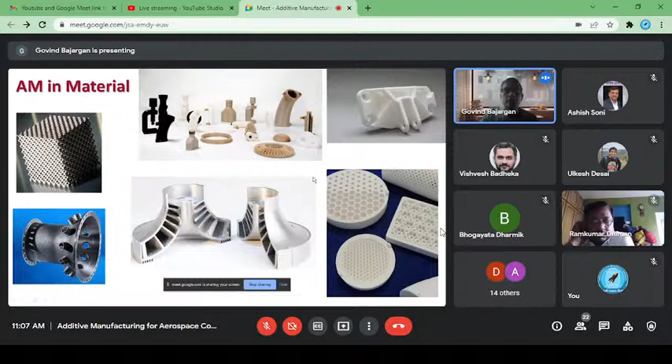So where AM is concerned - in metals, ceramics, polymers, you name it - additive manufacturing can be used in almost all areas. It gives the opportunity to print lattice structures, complex shapes, and geometries for engines and turbines, in metals as well as ceramics and polymers. Even in composites, AM has been used. In healthcare, it has been used widely. Even in smart structures, where you print an AM component with materials that remember a shape when subjected to some stimuli, you can design components in such a way that the material behaves as if there is no CPU, based purely on structural design. So AM gives you ample freedom in that regard.

So we come to AM, what actually additive manufacturing is. As most of you may know, additive manufacturing is incremental layer by layer manufacturing from a CAD model. You get a CAD model and you slice it, and each slice is deposited at a time to build the final structure. The materials generally used are powder or wire.

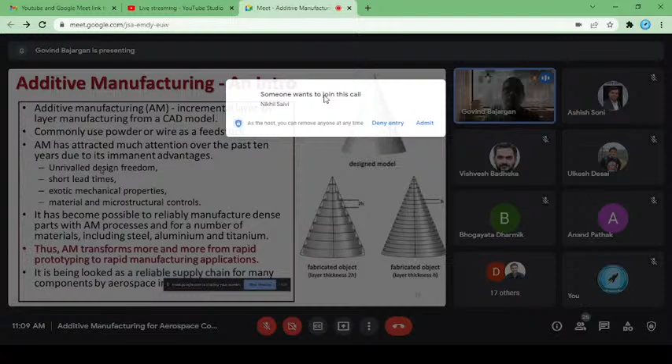Why it attracted our attention is because it gives a kind of design freedom which AM gives like no other process, and lead time is very short. And there is no compromise in mechanical properties. In fact, we found that mechanical properties are far better. It gives very good control on materials and microstructure. The process control is now so good that you can reliably get dense parts from a wide variety of materials without much trouble.

And AM, which was earlier considered as rapid prototyping, has changed to rapid manufacturing. It has become part of a reliable supply chain for aerospace.

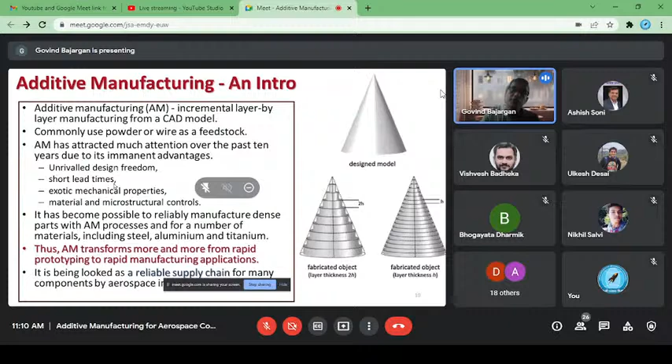Complex heat exchangers like this can be built by AM. So you see the conventional manufacturing, how it goes. A designer designs it, gives it to a CAD department, they generate a fabrication drawing, it goes to the materials team, they make a semi-finished material for that particular component, then it goes to the fabrication team and the final product comes out.

AM demands that all people, the designer, materials team, fabrication team, should come together to finalize the design, process design, component design, and then a product comes out. So there is a need to have integrated structural materials design tools, which will accelerate adoption of AM for the aerospace design community, and it can lead to innovative designs which save energy and weight.

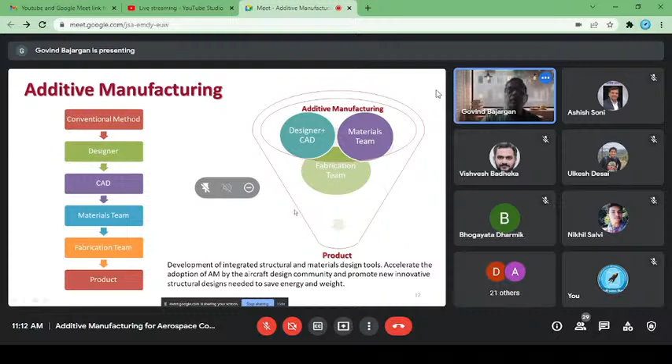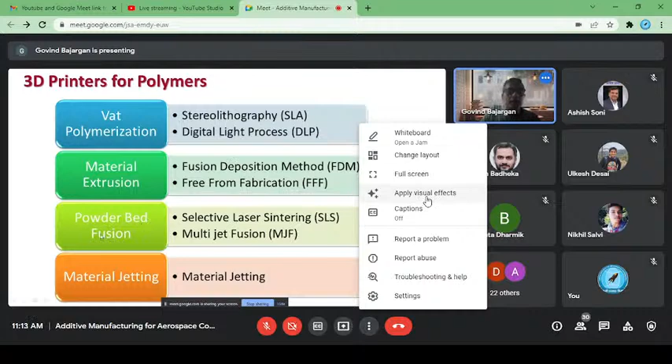So now they are basically based on 4 different types: vat polymerization, material extrusion, powder bed fusion, and we are doing curing, selective curing. There are 2 techniques: stereolithography and digital light processing. Material extrusion, we have FDM and free-form fabrication. Then powder bed fusion, we have selective laser sintering and multi jet fusion. Material jetting is another process.

So we'll come to the details of the process. Here is a polymer bath. There is a polymer bath, a laser is exposed on the surface as per the 2D slice, and it selectively cures it. After curing of one layer, it moves down by a distance equal to the thickness of the layer, and then the next process starts. So the adherence of one layer to another is controlled by the depth of curing, and this process is widely used for realizing polymer components: polycarbonate, ABS, polypropylene.

We have used it extensively in making investment casting patterns, and it is a very good tool for that.

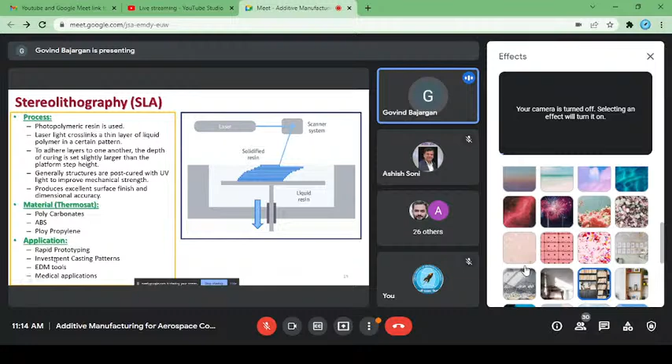In digital light processing, the process is slightly different than SLA, that is stereolithography. The platen movement is upward here, so the part is built at the bottom side of the platen, and the bath, the polymer quantity required, is much less than what is needed in SLA. So light comes from the bottom, and the bottom of the tank is transparent to the light, so light is exposed.

Light exposes the full layer of the photopolymer resin in one go. Unlike the previous case, where a laser was tracking the 2D sketch continuously in a layer, here in one go, full light exposes the full layer, so the printing rate is much faster. Moreover, it uses very common light, like LED lamps, which we use in the house, can be used for this. Once that layer gets photo cured, the platen moves up, another layer of resin comes in and it gets exposed. So this is the way it goes.

FDM is fusion deposition modeling, wherein thermoplastic filaments are used. There is a liquefier which is resistance heated, and filaments are fed to this liquefier, which deposits liquid.

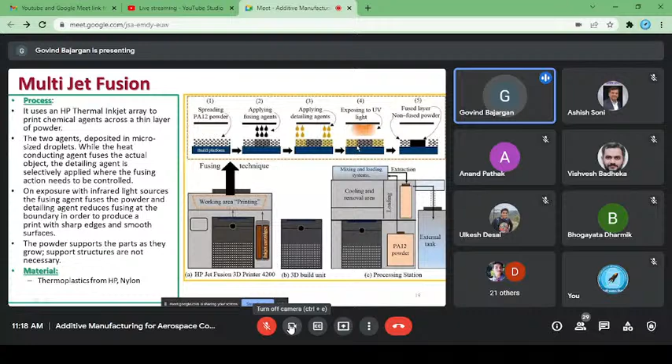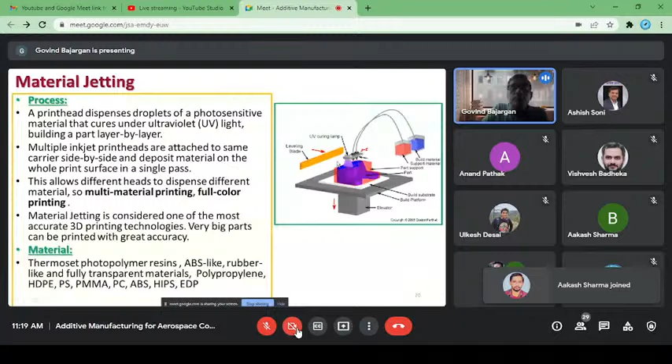In metal 3D printing, we have powder bed fusion, direct energy deposition, binder jetting, and sheet lamination.

In powder bed fusion, also known as selective laser melting, SLM, or electron beam melting, a metallic powder is laid on the print platform, and a laser scans as per the 2D drawing, then the build platform moves down. This is how powder bed fusion builds the metal part.

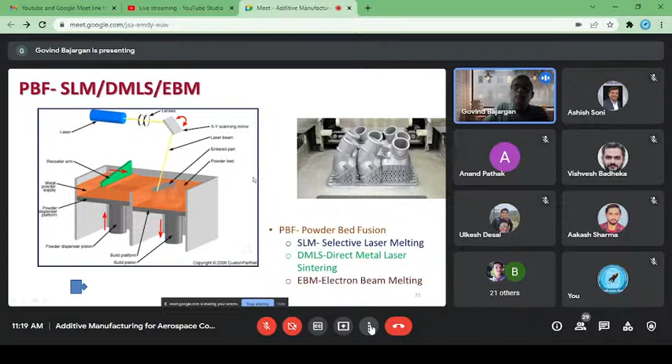In DED, direct energy deposition, there is an energy source. It can be an electron beam, or here it is a laser. There are two ways by which powder can be fed in DED powder processes.

It can be like in the center we have a laser source, and from the side powder is fed to the portion where the laser melts the base material, and this whole assembly moves as per the 2D sketch of the plane. It can also be coaxial, so either coaxial or from the side, powder can be deposited.

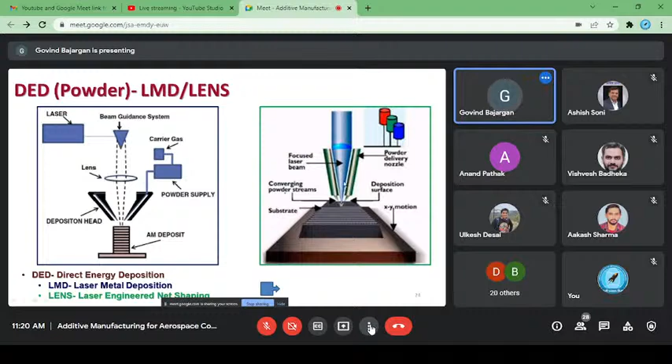Here we see the advantage that we have multiple feeder powder nozzles. It is possible to deposit a gradient in the material by feeding different powders.

We also have DED wire. Here we have an energy source, which is an electron beam or a laser, and the wire is fed and deposited.

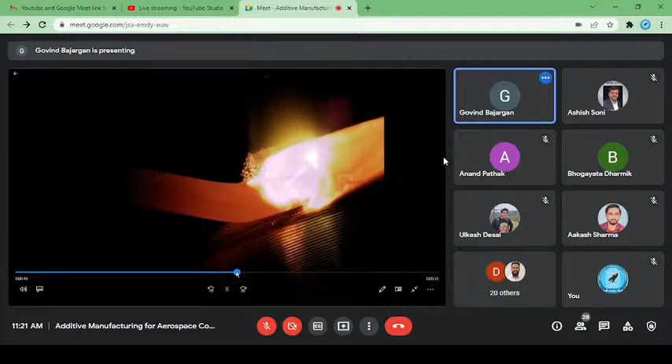See how liquid is getting deposited on any curved surface. This is a part fabricated, and this is after machining.

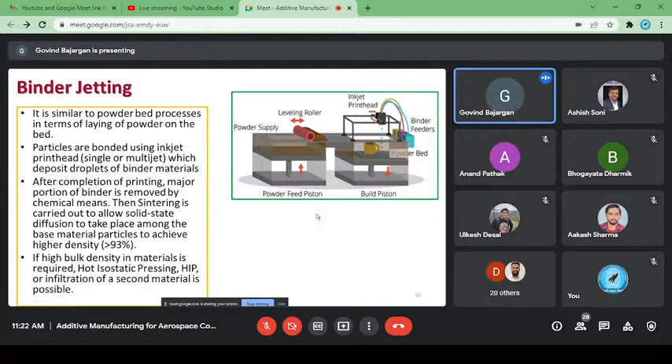This way we can build parts. So there are plenty of options available.

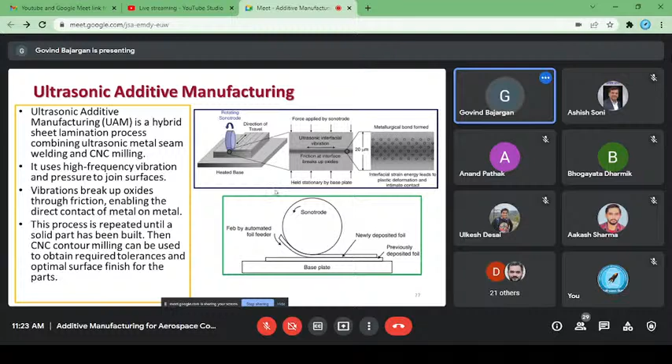There is another aspect: powder bed fusion sizes are limited. The maximum available now is 800 mm. But when we have to build a large part, we have to go for DED LMD or DED EBAM processes. Their build sizes can be larger, but complexity has to be compromised. So if parts are complex and small, powder bed fusion is an ideal technique. If they are large, we have to go for DED processes. It's also possible to have hybrid printing.

So, the AM process flow chart - we have just learned about powder bed AM techniques for metals as well as polymers, but now let's see the workflow of AM processes. First we make a 3D model, then convert it into STL format. Once conversion is complete, we decide on the part orientation, how the part is to be printed. Based on the orientation, support generation is finalized. Once support generation and orientation are fixed, the part is sliced into layers. For each slice, we finalize the tool path, and then the 3D printing process is carried out, after which it is subjected to post-processing and inspection.

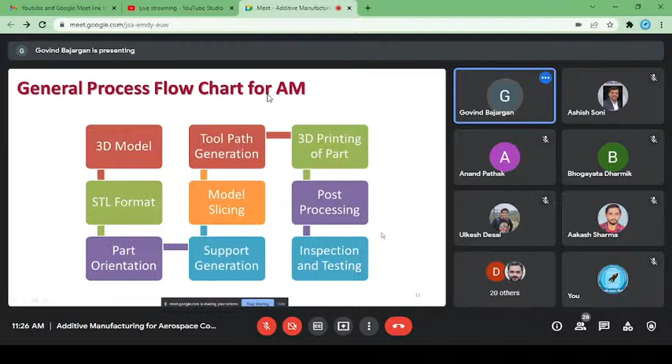So what is STL format? It is a standard tessellation language based format. It converts your mechanical engineering model - you must all be aware of it. The surfaces of a 3D model are represented as triangles. A CAD model generally contains information of both geometry and topology, but STL format carries only geometrical information. So we miss the topological information when we convert a CAD 3D model to STL format.

Each triangle is defined - in STL format, each triangle facet is defined by the 3 point coordinates of the facet and a normal to the facet, which shows the outward direction. So these are the three: this is the facet, these are the 3 points, and the normal to the facet defines each triangle. So we try to minimize the triangle size, because the smaller the triangle, the better the resolution in the AM process, which you will soon understand.

So we have more data points - if we reduce the size of the triangle, we'll have more data points. So the topological information which is missing can be partially contained within the geometrical information in STL. STL has its own problems, like inverted triangles, gaps, and overlapping.

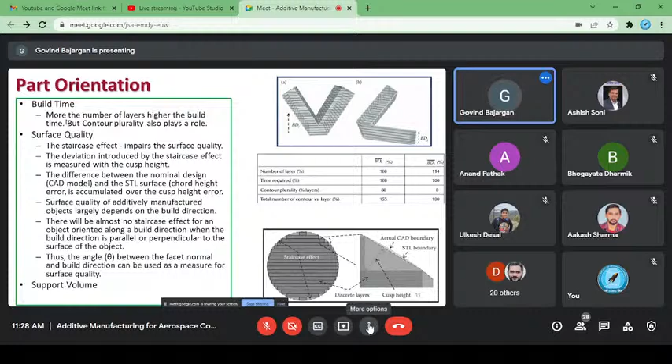Once we convert into STL format, we go for build orientation - we have to define how the part should be built, what the orientation should be. Orientation basically governs build time, surface quality, and support volume. So we want an orientation where build time is minimum, we get the best surface quality, and we require minimum support volume.

Okay, I'll probably not go into too much detail on this. Regarding surface quality and build time - suppose there is a rectangle, and if you build it such that its largest side is in the Z direction, then the build time will take more. So you will always want the smallest dimension in the Z build direction. That is the concept.

But there are many other complexities which control the build time. Then there's surface quality. When you divide the STL file into slices, you get an effect shown in the right side bottom. This is called the staircase effect, which impairs the surface quality, and it is to a large extent controlled by the thickness of the layer.

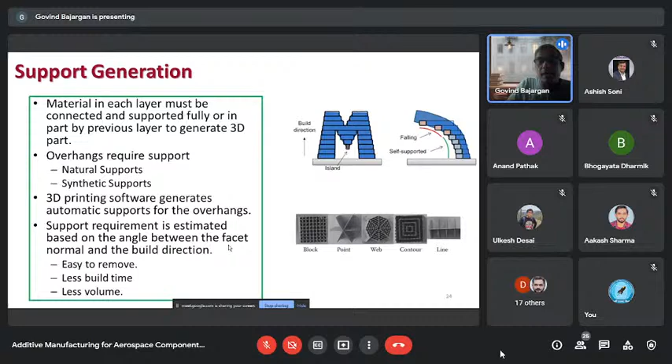But most AM processes use uniform slicing. The problem is that if we go for adaptive slicing, the material delivery system has to be controlled accordingly—wherever the layer is thicker, more material has to be deposited, and where the layer is thin, we have to deliver less material. That's one problem. The second problem is that when layer thickness is more, the energy input needed to melt that layer changes depending on the layer thickness.

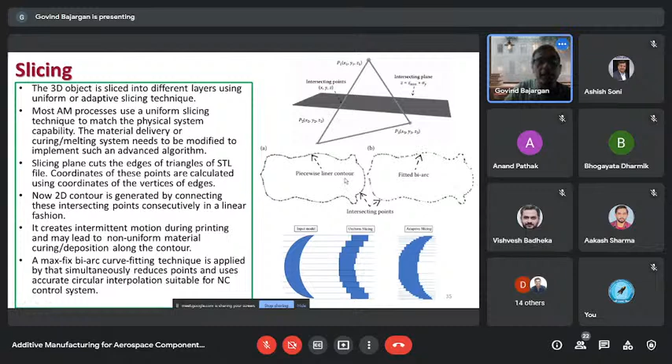We are not comfortable with that zigzag motion, so the whole contour is smoothened by curve fitting. This gives us the opportunity to control the losses we had in chord height error, and we get a smoother contour with fewer points, which can also be reduced.

Next, we go for tool path generation. So we had STL format, orientation, build-up, support, and slicing. Now each slice needs a tool path — we have to define how the energy source should move on that path to generate the product.

In addition, we have to do a contour scan. The whole outer profile is scanned by the contour scan first, or it may be the last operation depending on what we choose. So there is infill scanning and then contour scan — both scans have to be done.

Now the process controls are so good that we can get a fully dense part, and we can control the microstructure and properties. We can minimize build time and residual stress. These options are available, and these processes give ample freedom to control these parameters.

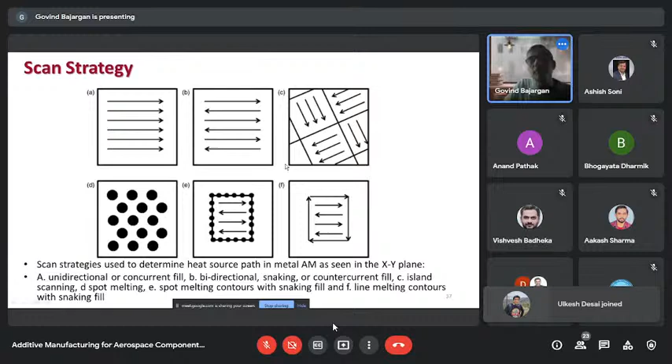Now there are many AM materials. Additive manufacturing inventors initially worked with commercially available materials, since that was easiest, and process parameters were developed for these conventionally available materials. Even for some newer materials, process parameters have been developed. But I strongly feel that just as we have cast alloys and wrought alloys, we will also have AM alloys — alloys which will comprise many conventional materials, as well as new materials that cannot be processed by any other process, only by AM.

So this research has some inherent advantages. Because of the inherent processing advantages AM gives, it is possible to design alloys that we were not able to process conventionally. Now it is possible to process those alloys, and people are coming up with many new compositions possible only by AM, which can give a very fantastic combination of properties.

Now, since my talk will be more on powder fusion, we've understood the processes. Now let's see how the flowchart goes — the first thing is powder. For powder fusion, we require powder.

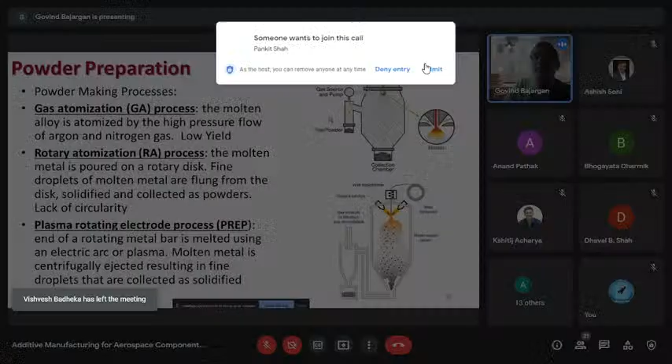The powder-making processes, as most of you know, include gas atomization, where liquid metal is melted in a crucible and allowed to fall through a nozzle, while gas — either argon or nitrogen — is impinged on the falling liquid at high pressure, causing it to break into small droplets which solidify during flight in the chamber and get collected at the bottom.

Then there is rotary atomization: molten metal is poured onto a rotary disc, and when it falls on the disc, it flings away as small droplets, solidifies, and is collected at the circumference. Then there is the plasma rotating electrode process.

It is widely used for reactive materials like titanium, niobium, and so on. Here, an electrode of the material is melted by plasma or an electric arc, and then it is rotated.

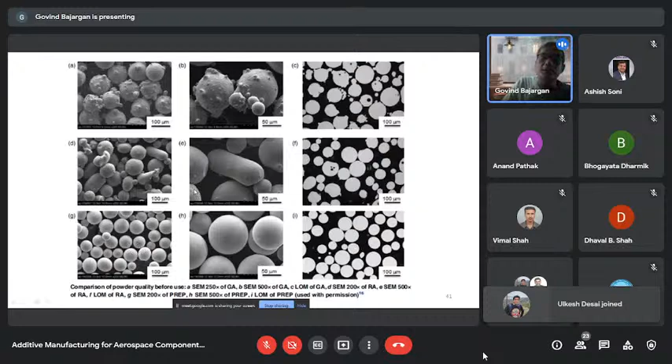So there is a centrifugal action on the droplets which are forming at the arc location, and it is ejected out. During flight, it gets solidified and then collected. So these are the pictures of the powder from these processes. First three images on top are gas atomized, then in middle we have rotatory atomization, and then the PREP process. Through all these processes, powders are made and used in AM.

So once we have a powder, what kind of characterization do we have to do—whether any powder is okay for us, or what kind of characterization we should carry out. So first thing is, what do we want?

We want that in powder bed fusion, when powder is spread on the build platform, its density should be highest. That is the aim we are having. So for a given layer thickness, how to get the maximum packing density for the powder. Then the question becomes, what should be the preferred powder size?

Literature says that the finer the powder, the lower the packing density. So fine powders generally give a lower packing density. So should we go for larger and larger particle size?

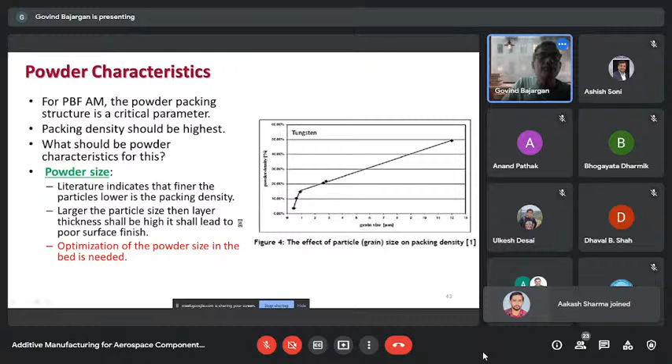That is one part. Second part is, what should be the shape? Generally spherical shapes give the best packing density. And what should the particle size distribution be?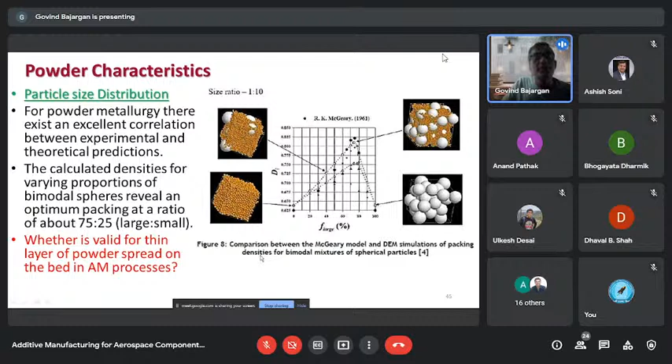In powder metallurgy there exists a very good correlation, wherein it is found that 75% large and 25% small powder, if mixed, gives the maximum packing density. But in AM we don't have the ample opportunities that powder metallurgy has to compact the powder—all those processes are there in powder metallurgy, but not in AM. So whether those findings can be directly taken to AM is the question mark.

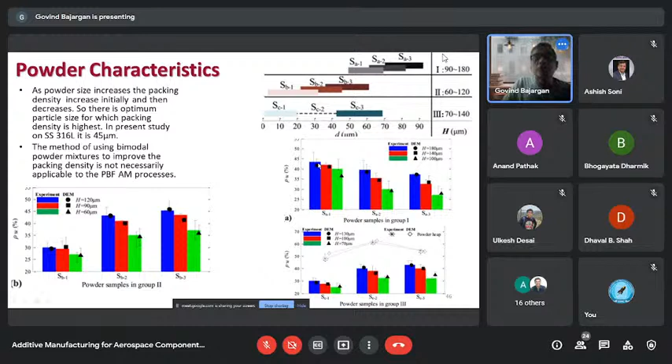There were many studies done on this. I'll not go into details—we'll directly come to the conclusion.

The powder spreading process is actually important. It determines the packing density of a powder layer, and it directly influences the interaction between the powder particles and the heat source, therefore affecting the properties of the finished part. In selective laser melting and electron beam selective melting processes, a dense powder layer makes the fusion more steady.

Why do we want it dense? Not only to have a dense part, but our fusion process—the interaction of the energy source with the powder—becomes quite stable and steady, and we reduce defects like balling, shrinkage, and pores.

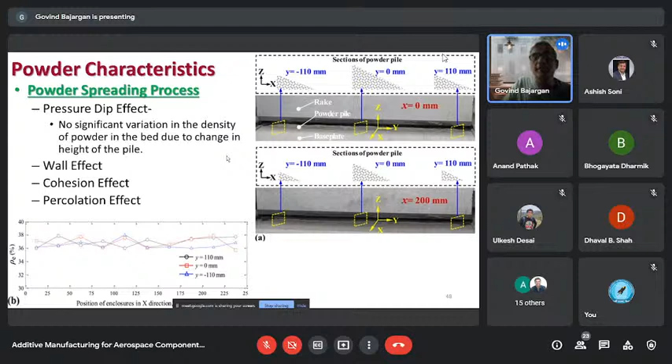When powder is laid on the powder bed, there are many effects that play a role. I'll just give you a glimpse of it—I won't go into details since it's more related to powder metallurgy.

The first interesting thing: this is a rake or recoater, and there is a powder bed height. If powder bed height changes, does powder density change—does bed density change? They found it has no relation with the powder bed height. The powder bed density is independent of height, so whatever height we play with has no role on the powder density.

Another point is the wall effect—the top rake moving and the bottom build platform. Some powders hindering these two walls get pushed away, so the rake and base plate cause porosity in the bed. This contribution increases with increasing particle size—if particle size increases, the wall effect contribution increases, leading to lower packing density. There's also a cohesion effect, where powders agglomerate, and this tendency is more pronounced in finer sizes.

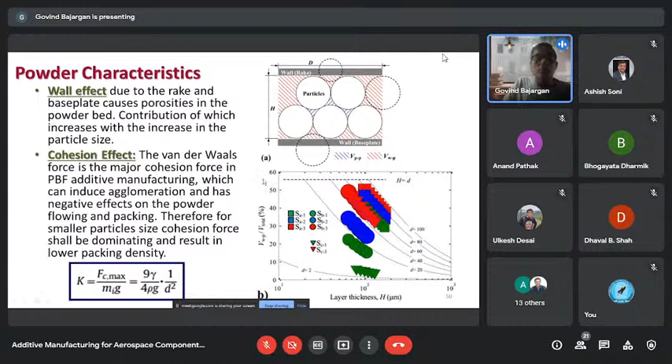All these studies have been done by researchers, and I'll just come to the final conclusions. The guidelines drawn from these studies are that commercial feedstock for SLM follows a Gaussian distribution, and existing results have established preliminary powder requirements suitable for SLM processes: the D90/D10 ratio should be less than 19, D50/D10 should be greater than 10, and 90% of the particles should have a diameter less than the thickness of the layer. This is the criteria which has evolved.

In powder bed fusion AM, relative packing density is generally in the range of 40 to 60%.

Reducing voids in the coarse powder matrix by adding fine size particles may not be a practical solution for SLM, which was widely used in powder metal, because of many effects studied. Powder particle size below 30 micron tends to exhibit clustering behavior due to cohesion and interparticle forces. Powder flowability becomes more restrictive with decreasing particle size. We want powder to flow well and packing density to be highest, so finer particles, which have a tendency for clustering, cause accumulation problems.

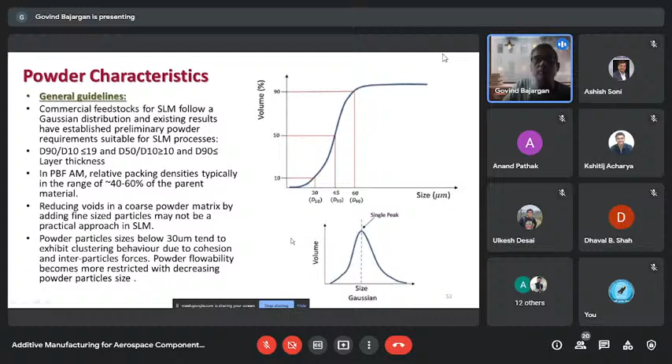So now we know what should be the preferred powder size. Now we can come to what parameters are important for building with an AM process like powder bed fusion. What exactly are we looking for? We are looking for density, maybe 99.5% or higher dense product.

Surface finish should be good, of the order of 10 micron generally we can get easily. Residual porosity should be less than 0.5%, and we want a fine length scale of microstructure, and the deposit should be free from cracking, swelling, and delamination.

There are parameters which are laser dependent, powder dependent, and machine dependent. Laser power and scan speed are really two very important parameters, and then there are spot size and scanning strategies, which are also equally important.

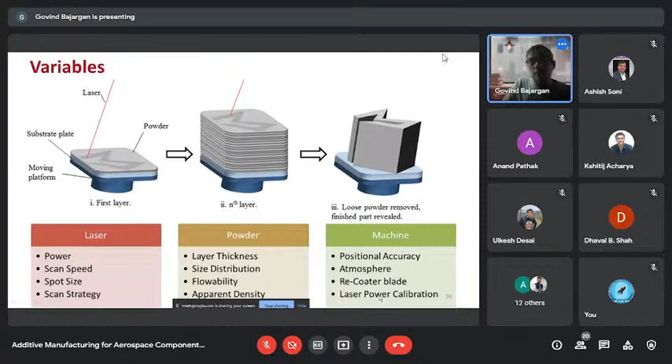Powder characteristics: generally we check flowability and apparent density, and particle size distribution. The machine has its own parameters like positional accuracy, atmosphere, recoater blade, and laser power calibrations. These are the few important things for the machine.

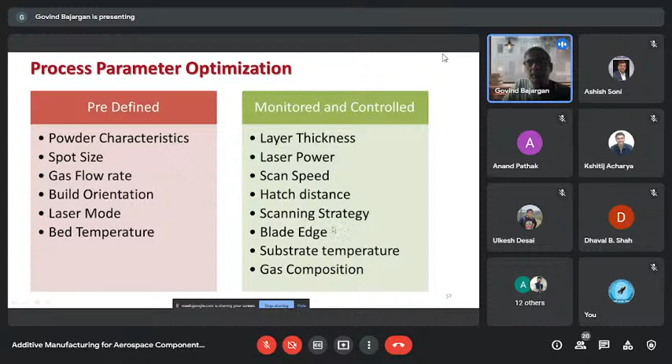So most of these things are predefined. Powder characteristics, spot size, gas flow rates, and build orientation are predefined parameters once we start the build. Then some things we need to monitor and control: layer thickness, laser power, scan speed, hatch distance, and scanning strategy. We'll discuss some of these in subsequent slides.

Studies have shown that if the orientation of scanning is changed by 67 degrees from the previous layer, and we keep doing that, we can control the anisotropy in AM deposits. So now we have learned the parameters, and we have learned about powders and all.

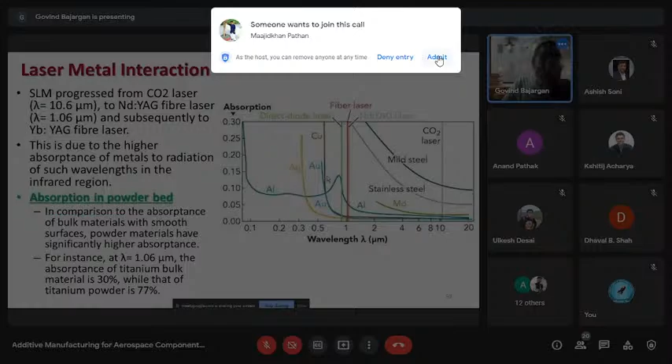Now laser has a very interesting aspect. When we expose the material to the laser, we want the material to absorb that laser. Most of the available data was for solid materials, not for powders. So in a powder bed, how will the absorption be?

It has been found that since the SLM process started with the CO2 laser, with a wavelength of 10.6 micron, shown here in the figure, the solid metal absorption for mild steel, stainless steel, molybdenum, and aluminum can be seen. Aluminum hardly has any absorption, only 2-3%, so most of the CO2 laser gets reflected from aluminum. Stainless steel has around 5% absorption from the solid piece.

So when SLM started with the CO2 laser, it was not possible to deposit aluminum because aluminum was not absorbing enough quantity of laser. Then it was changed to neodymium YAG, and then ytterbium YAG fiber laser. When it became ytterbium or neodymium and ytterbium fiber laser, the absorption quantity on aluminum and others increased, but copper absorption is still very low.

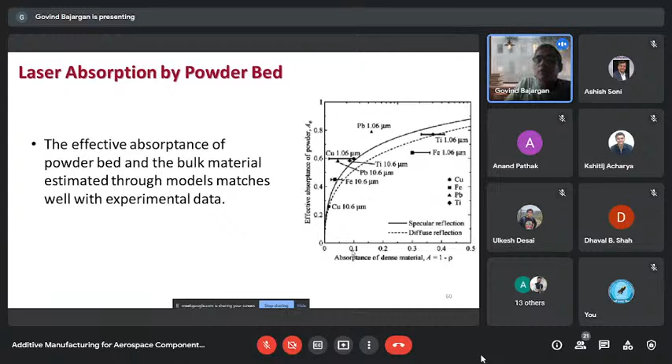So we saw one advantage of using powder bed is that absorption of the laser is far better, and it is good for fiber laser. How does the laser interact with the powder?

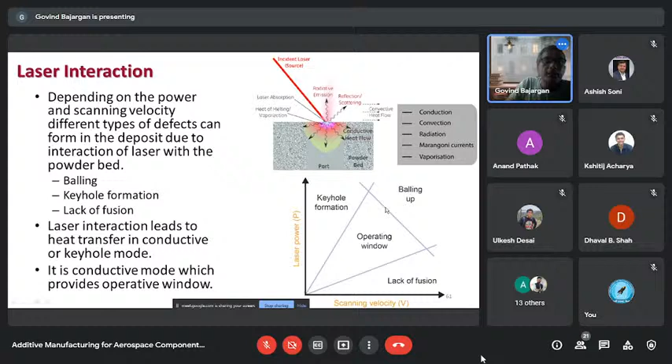So here I'm showing the balling effect. What happens is when laser energy is very high and speed is high, the laser is moving in a line, so we are creating a liquid line, and this line becomes unstable. It's Rayleigh's instability criteria. It is similar to water falling from a tap - if we narrow down the flow, that continuous stream divides into small droplets.

So the same way it happens here. Rayleigh's instability comes into play, and instead of a single continuous track, we end up with a formation of balls or droplets, which will hinder subsequent builds also. There are remedies - all remedies are related to controlling the power and scanning speed.

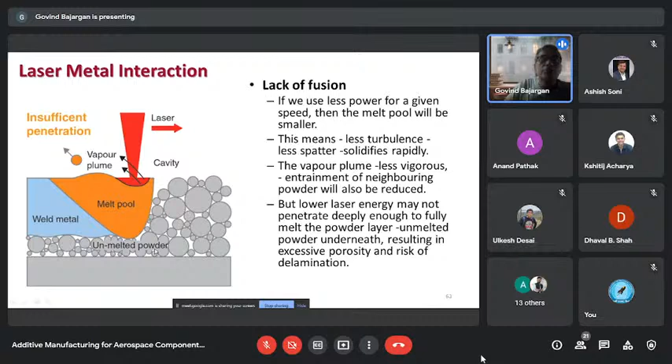So there is another thing. If my energy is not sufficient, I'm not able to melt fully, so there will be an unmelted zone. It'll lead to a lack of fusion. So we have to optimize in this.

And if my power is too high for a given speed, we can end up in a very deep melting zone, and because energy will be so high, some evaporation will happen. When this liquid pool collapses, this evaporation and these vapors get encapsulated, and there may be a keyhole formation. This is why there will be pores because of keyhole formation.

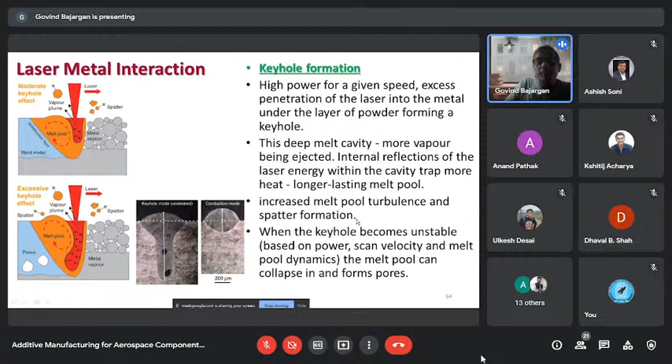Okay, so these are the laser-powder interactions. Just to understand how much energy is required for melting for a given layer thickness, and how to estimate that, I've made a small graphic presentation.

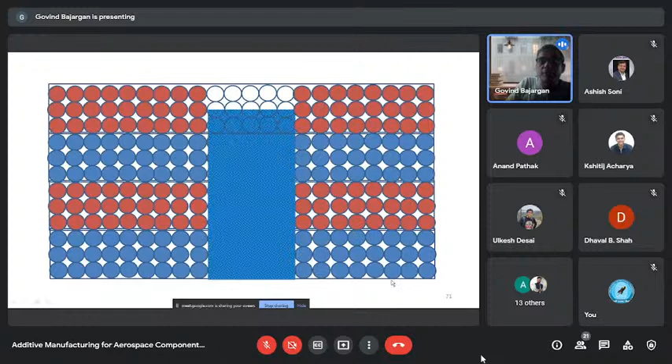So now again, the laser has to melt this much powder and base, so this much amount of energy will be required. Then we come up with 1.5 times the thickness - the powder layer height has become 1.5 instead of one, and now the laser has to melt 1.5. So this way it continues.

When I plotted it with the layers - what will be the thickness of the powder which the laser has to melt - assuming the powder bed density is 40%, 50%, 60%, I find that in the first condition, the laser should have sufficient power to melt approximately 2.5 times the layer thickness. So now, most powder bed fusion parameters are selected in such a way that they are able to melt approximately 3 times the layer thickness.

So this basically is to get a sound deposit, to ensure the bonding between one layer to another layer when deposition is happening. The important parameters, when we talk about process optimization, mainly 3 parameters are really important: laser power, scan speed (the speed at which laser scans the build platform), and then the hatch spacing, meaning the distance between first scan to next scan.

These are the parameters which we have to finalize. Layer thickness and all are generally fixed for most of the processes, around 40 to 60 microns. So we have to finalize what should be the laser power, hatch spacing, and scan speed, so that we can get a sound deposit, required microstructures, and a component meeting all the requirements.

So there are some thumb rules which are used to optimize the process parameters. I'll try to skip this, because it'll be too much detail, as it is based on some analytical models.

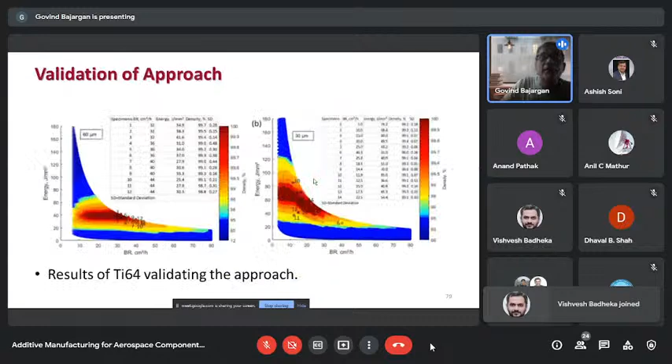So I'll come to one simplified model which people have very innovatively used. What they did is they estimated the melt pool when a laser forms it. This can be estimated experimentally, as well as using the Rosenthal equation.

By changing the process parameters in the equation, we can find out what the dimensions of the melt pool are, and by changing the hatch spacing you can model it and predict where the unmelted zone will be and which condition will lead to a fully dense product. These are very simple techniques people have used to resolve the issue of optimization, because it's a very complex task.

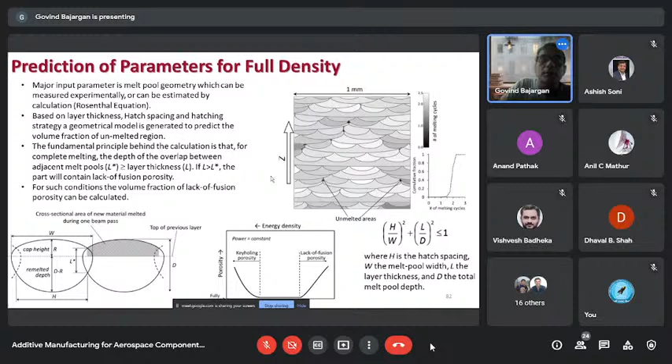We have done a similar simulation in CAD, wherein what we wanted to show is that when we are depositing liquid and the subsequent layer, the scanning angle is changed by 67 degrees. So we know that the laser will melt at least 3 layers.

So we find out the zones which are melted 2 times, zones melted 3 times, and zones melted a single time. We wanted to know if such zones show any change in properties. We did some hardness checks and found that hardness is almost in the same range, with not much change. Microstructurally also, we didn't find too much variation, so it gives a fairly uniform microstructure.

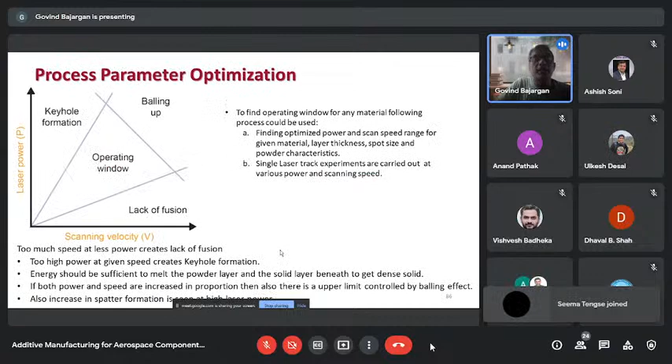Okay, this is also toward parameter optimization. Probably for this audience it may not be that useful, so I'll skip this portion of my talk.

In addition to parameter optimization, particularly what we talked about - laser power, scan speed, and hatch spacing - there are many other important points we have to take up. We have to consider this while defining the process, like part geometry.

If it involves thinner walls sitting over thick portions, or thick portions sitting over thinner walls, it generally leads to heat buildup because heat will not pass through. These kinds of problems can locally change the thermal gradient, and this may lead to residual stresses and other issues.

So we have to find a solution from part to part. Generally this kind of problem's solution lies in heating the bed to reduce the thermal gradient. There are many things like overhangs - if overhangs exist, the bottom portion is supported by powder, which will not have that good thermal conductivity, so the cooling rate will be slower there.

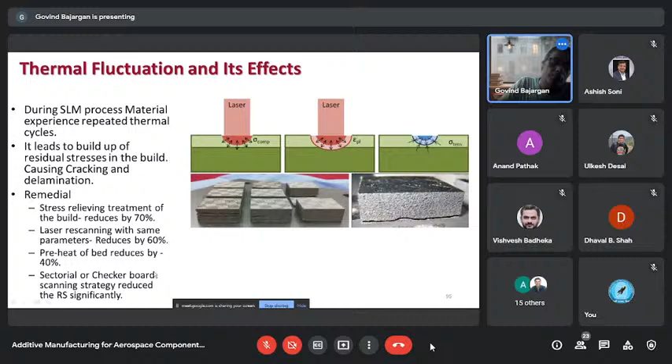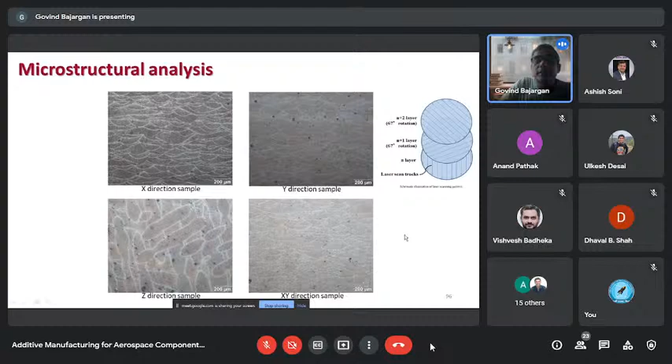We checked the hardness and didn't find much variation. It is well within ±5, which is very common in some materials. The very interesting thing is that the properties we are getting are far better than what we can get with conventional processes.

I was a bit surprised because it was aluminum, and aluminum generally forms an oxide layer on the surface very fast. But in spite of that, even ductility is very good in the as-fabricated, as-printed condition. Then when we devise a heat treatment, different treatments give you flexibility. If you go for different heat treatment combinations, you can compromise strength but get very good ductility—18% you can get. So this kind of freedom is available in AM.

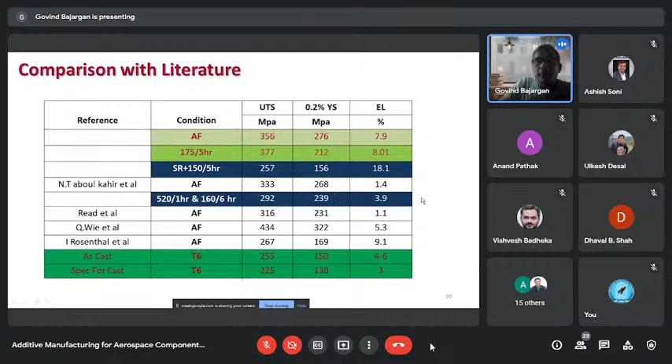And then there's topology optimization. It was not part of my original plan—I never wanted to cover this in this talk—but let me just give you a glimpse of it.

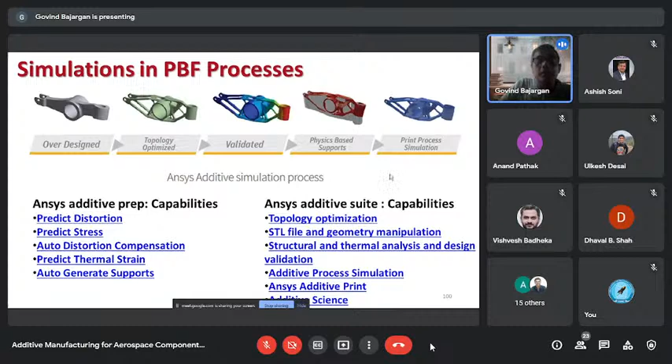So what are the advances happening? One advance that has really impressed me is support-free 3D printing. Velo3D, one company, has come up with a unique approach whereas they can print parts without any support. This is really interesting.

Then there are people coming up with artificial intelligence software for monitoring 3D printing during the process, so we know if something goes wrong in the process, we can capture it. Feedback controls are also being developed—is it possible that when printing is happening and something goes wrong, feedback comes and the process controls it? This would make the process free from trouble, but it is still under development.

In-situ inspection is another area, because when you print a complex part, inspection becomes really more complex. We cannot go with conventional inspection methodologies because it will defeat the whole gain AM gives you. AM delivers components fast, but conventional qualification methods take so much time that it defeats the whole purpose. So there have to be techniques or in-situ inspection technologies being developed.

Body structures like shape memory effects, thermal conductivity effects, and all those things are possible to design, and people are doing that. There's also selective powder deposition—people are developing techniques wherein you can deposit different powders, so you get control on the voxel. Like pixel is in 2D, voxel is in 3D, so you can control the material in a voxel—what property you require in a voxel, that level of control is being attempted through AM.

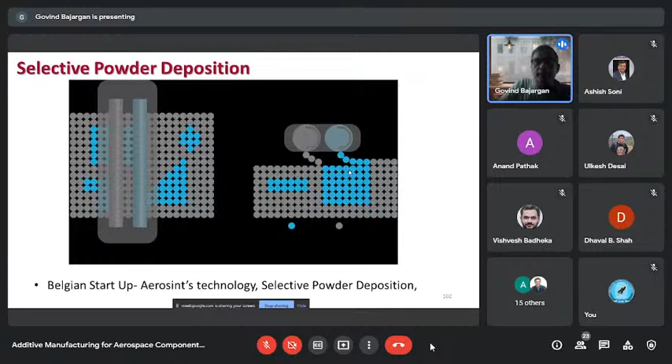So challenges ahead include benchmarking the capabilities of the process in terms of design, developing integrated in-process sensing, monitoring, and control. This is really important if we want to go in a big way, because qualification of parts is really important for aerospace. Smart structures, 4D printing, new materials, lattice structures—there are a lot of opportunities in this area.

Microstructure modeling is another area where many labs in India are working, and post-processing is a challenge because for complex parts, if you want good surface finish, post-processing is important. We need alternatives to conventional qualification methods. The kind of parts we should select are generally complex parts with high lead time, assemblies requiring a lot of welding or fasteners, or repair of parts. These are things where AM can easily be switched over to. With that, I'll thank you for your patience listening, and I'm open to questions.

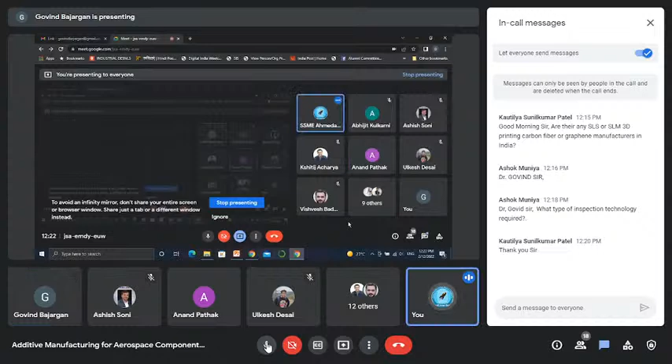Sir, I have a question. As you said there are thermal fluctuations, and you talk about laser rescanning with the same parameters - how does laser rescanning with the same parameters help solve this problem of thermal fluctuation?

No, laser rescanning is not the same parameter. For controlling the residual stresses, what they do is the previous layer - the layer what you are printing - is preheated by laser first, so it doesn't use the same parameter.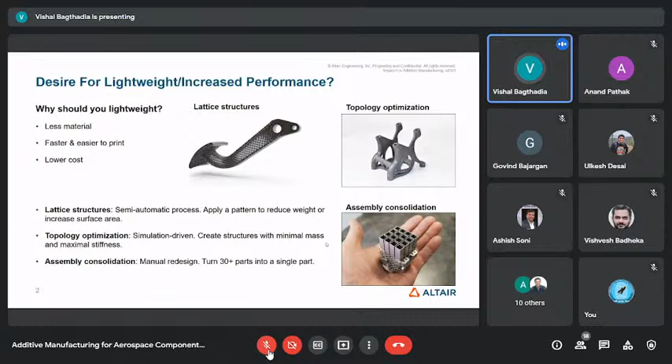Dr. Govind gave a great session on additive manufacturing. To extend on that, I'll be speaking about overall simulation aspects when it comes to additive manufacturing, and also the design aspects of it. When we talk about lightweighting and increasing performance with respect to additively manufactured structures, the primary motivation for lightweighting is to reduce material, which leads to faster and easier printing as well as lowering the overall cost. For the design aspect, we can complement additive manufacturing using lattice structures, topology optimization to enable lightweighting, as well as assembly consolidation to reduce number of components into a single part, turning a 30-piece component into a single part. I'll mainly discuss Altair's point of view on design for additive manufacturing and how we provide the simulation platform to carry this out, covering two main approaches and the overall process.

Starting with the topology optimization approach, we offer a platform where the typical workflow starts from taking a base model, understanding its overall design performance, and understanding the overall scope for lightweighting. You can further develop the package space, then carry out optimization through various iterations, controlling manufacturing constraints and the overall shapes you want to generate. Once done, we also provide a platform to carry out printing process simulation, then reiterate and carry out the overall performance check. We take care of design fine-tuning, surface generation for a smooth final product surface, and then take it to production.

Topology optimization is also complemented by overall control over manufacturing processes. We can control member thicknesses, draw direction, extrusion, but primarily for additive manufacturing, we can control the overhang of the design. We can predefine the overhang angles we want to establish for the design so that we get no support in the final process.

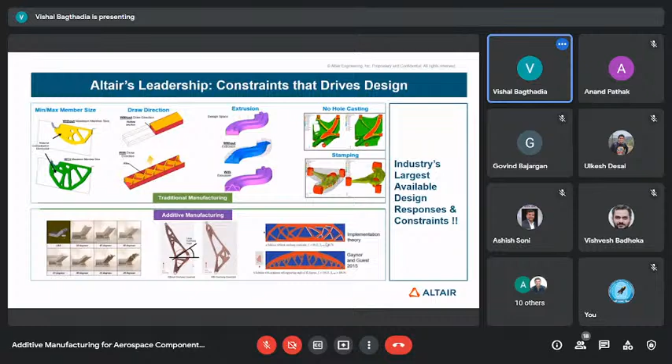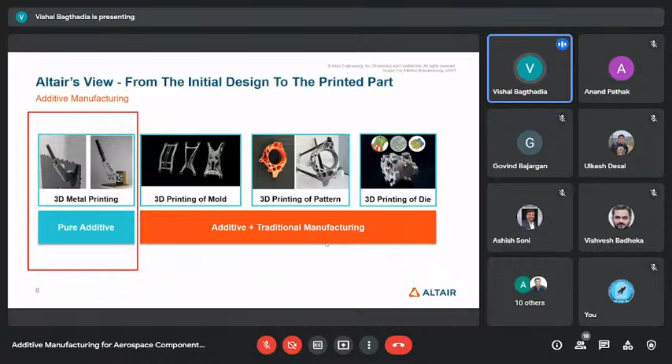As we can see, when we carry out topology optimization, different design concepts based on different manufacturing constraints you apply lead to different designs. To talk about purely additive manufacturing with topology optimization, I'll take an example of an antenna mount from Ruag, where they took a base CAD design originally made of bolted aluminum.

They generated the overall package space, carried out the optimization, and based on that the design interpretation was done. Once the design was generated, the geometry was created using PolyNURBS, which is smooth solid modeling done over the original topology optimized design. This lets you generate a completely smooth surface model. Once that was done, the design was evaluated, the geometry validated, and it was manufactured, leading to around 43% mass reduction and an increase in frequency.

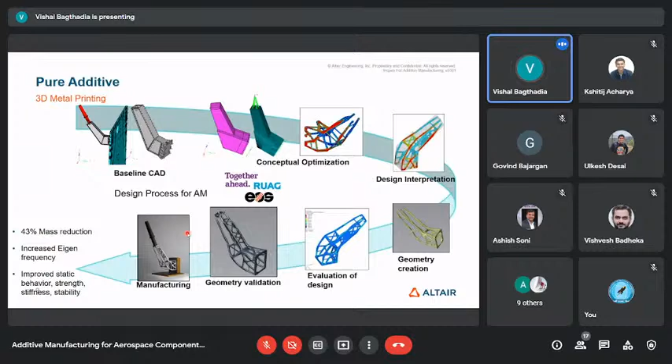Another similar case was done with Ruag and an Israeli aerospace company for a moon thruster bracket, where the original design was understood and analyzed — around 4 kgs with a frequency of 80 hertz. Optimization was done to find the design tendency and which option was more convenient in terms of manufacturing, and a feasible design was chosen.

Once that feasible design was obtained, it was PolyNURBSed to make a smooth surface, and it was identified how it could be split. Once that was done, the structure was manufactured, and we saw a significant reduction in mass as well as an increase in frequency — from 80 hertz to 350 hertz base frequency, and mass reduced from 4 kgs to 2.9 kgs.

Another approach for complementing design and additive manufacturing is lattice generation. We offer lattice generation, and its main purpose is to drastically reduce mass while giving better stability, better thermal behavior, and improved design characteristics. We have two approaches to lattice structure generation.

The first approach is the tetrahedral approach, where we take the structure and define lattice parameters — lattice length, lattice diameter, and fill ratio. Based on that, the tool will first analyze the model, understand which are the stress concentration regions, and decide which regions should have what kind of lattice. So this isn't just a dumb fill lattice — it's based on structural performance, giving results better suited for structural performance.

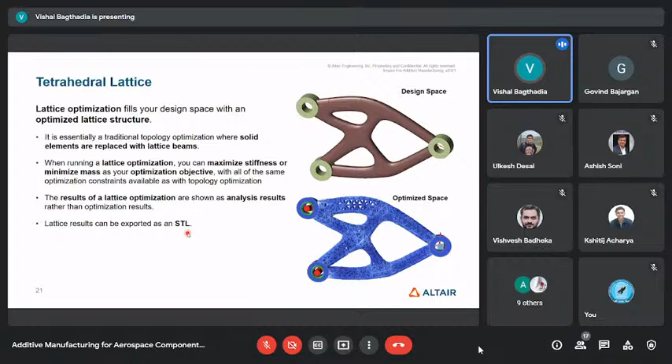Apart from the design aspects — topology or lattice — we can take that forward to get a better understanding of process simulation as well, by enabling printing simulation on the same platform. The need for printing simulation is to avoid failures and restrictions in geometries, understand the risks, and identify drastic thermal deformations.

To take care of that, we have a process set to simulate printing, where we can select the part, configure the printers, orient our part, generate the support inside the software itself, preview the slicing, directly export it for printing if suitable, and run a thermomechanical simulation.

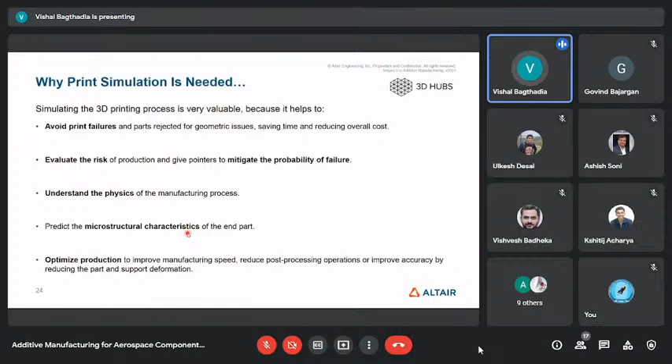So when we talk about what type of printers we support, printers from EOS, SLM, Renishaw, as well as you can have user defined aspects of it. We can generate different types of support, be it a pin type, tree type, block, and so on.

The materials, we have a default material library which can also be customized by giving the various physical and thermal properties. And when we talk about process parameters, we can set the parameters of the printer, be it the velocity, the laser power, powder thickness, powder absorption, cooling temperature, and so on. And currently we offer the layer by layer strategy, but in one direction.

And when we talk about the thermomechanical aspects, we can check out the displacement, strains, and temperature, so we can mainly check out the spring back and also the pre-stresses in the structure.

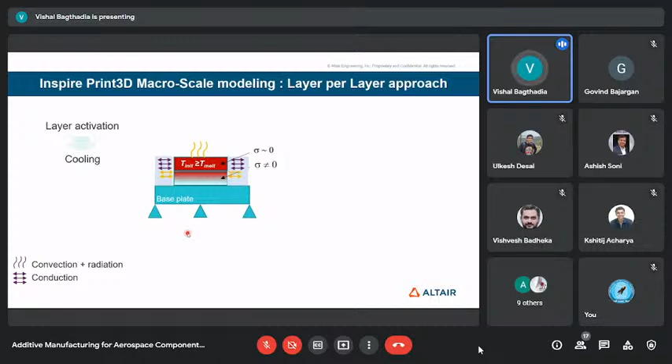So just to tell you about the approach that we use, what we do is we have something called a voxel mesh that gets generated out of the structure. We take one layer of the mesh, understand its thermal performance, and then activate the next layer. Based on that, the conduction between the layers as well as the outer region, and also the convection, gets taken into consideration, where one layer will get activated, the other layer will get cooled, and the next layer will go on and on.

So by the end of it, the overall thermal mapping will be done, as well as the spring back will be understood once the support gets deleted from the structure.

We have verified the printing simulation that gets simulated in the software with the actual results, wherein we have gotten a very good correlation with the physical data.

And we have also enabled it for optimization, wherein the original design had a lot of support structure because of the overall overhangs in it. So that was removed using the overhang constraint that we got.

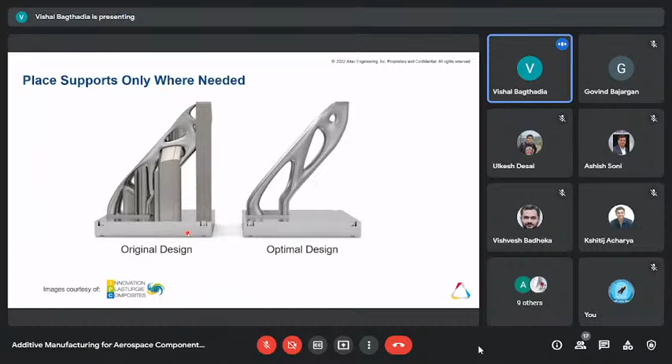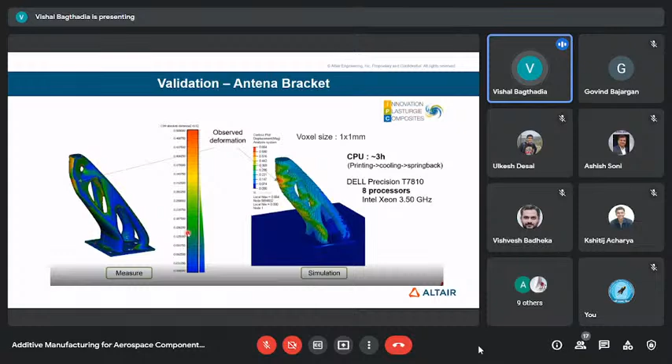We generated a self-sustaining structure which reduced the support drastically, and then it was also correlated in terms of the printing performance of it, where we observed a significant match in terms of the displacement that came in the actual printed model with the printing simulation model that we have.

So to just summarize all of this, the promise of additive manufacturing in terms of design aspects would give, first of all, the geometric freedom to go more towards the lightweighting approach, as well as part consolidation, and it would also accelerate the product development and give design individuality.